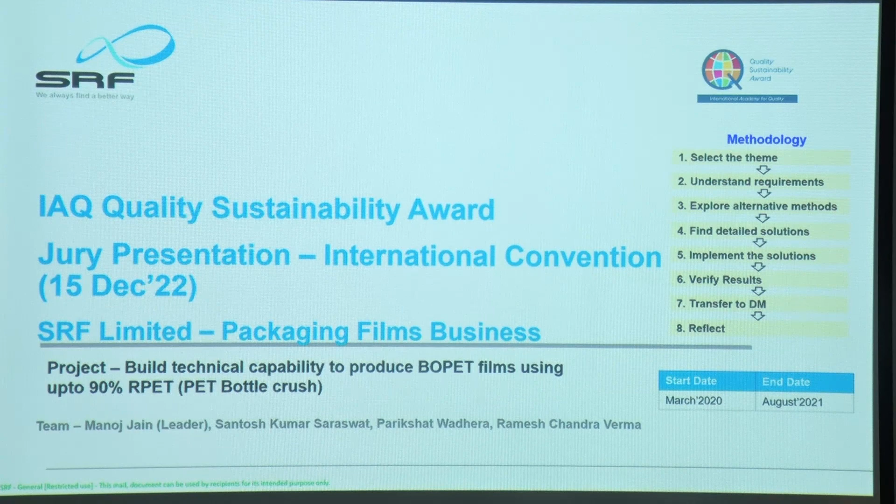So to solve this problem, we are using SRF's 8-step proactive problem solving methodology. My name is Manoj Jain and I am the project lead for this particular project.

So where is this need coming from? This need is coming from the fact that SRF had taken an aspiration 2030 to be more socially and environmentally responsible. There were various global industry forums having focus on reduction of virgin plastics, and there were various FMCGs and brand owners looking for sustainable value chain partners, which led us to take this policy goal in FY21 about accelerating sustainability initiatives, under which 4 different themes were identified. While there were other teams working on means like single family structures, product portfolio shifting from packaging to industrial, we thought of taking 3R as a challenge, under which we took the theme of building technical capability to be able to use 90% of PCR PET.

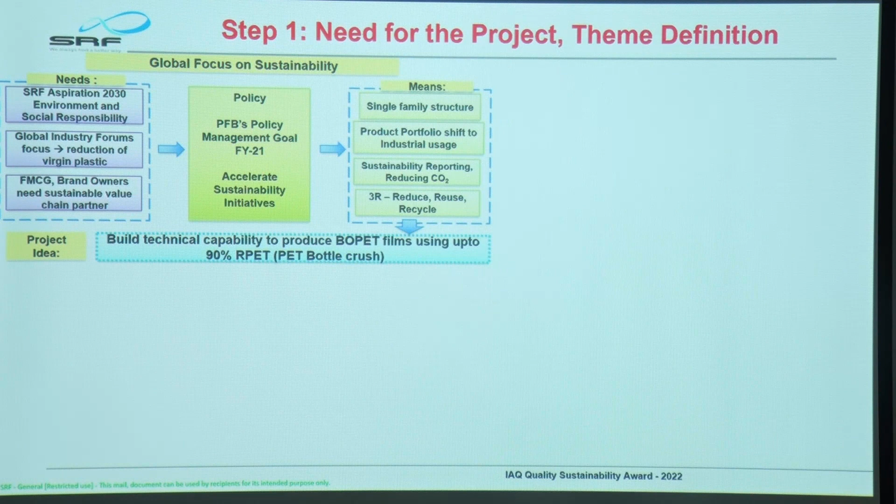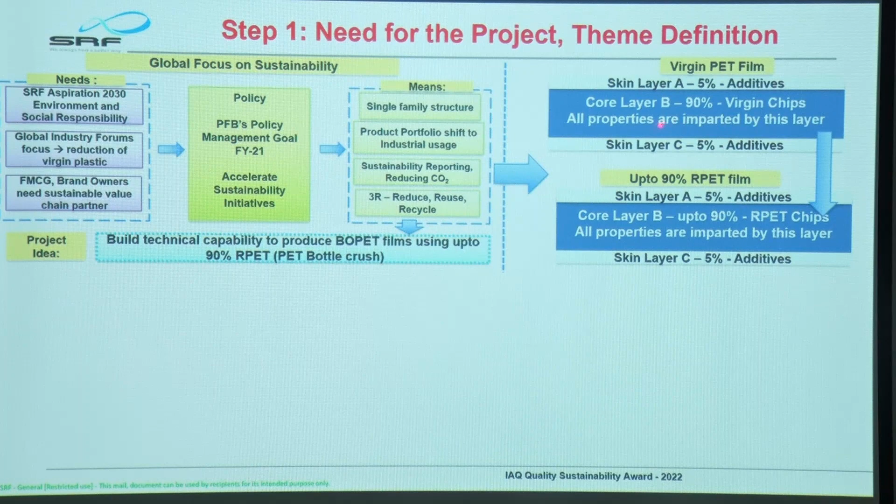So if you look at the structure of the film, it is a 3-layer structure where 5% on both sides is the skin layer with 5% additives, and 90% of the core layer, which is layer B, contains 90% virgin chips, and most of the properties in the film are imparted by this particular layer. And the goal is, how do we replace these virgin chips with PCR PET?

So if you see the flow chart of the process, virgin chips are coming from the resin plant. They are mixed with in-process recyclable waste, goes to the extruder. Then there's biaxial stretching in machine direction orientation and transverse direction orienter, and then finally a jumbo of 8.7 meters is produced, which is further slit into various widths as per customer requirement. So the goal is to replace virgin polymer with 90% PCR.

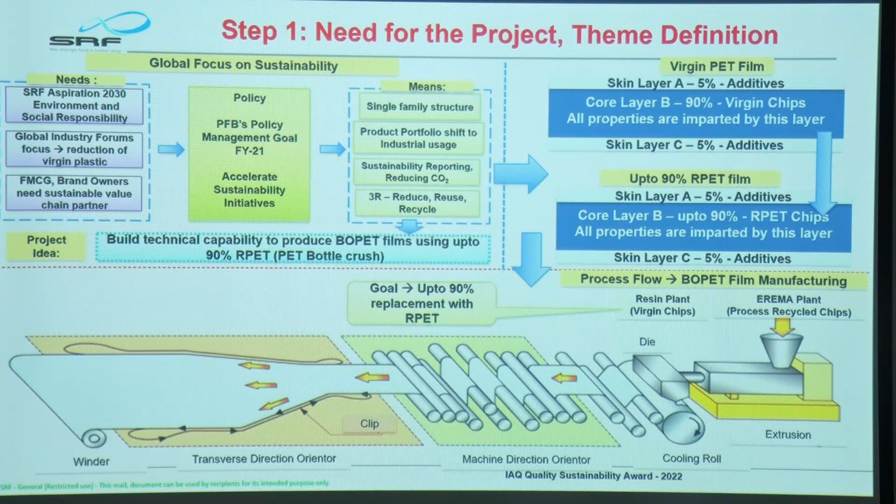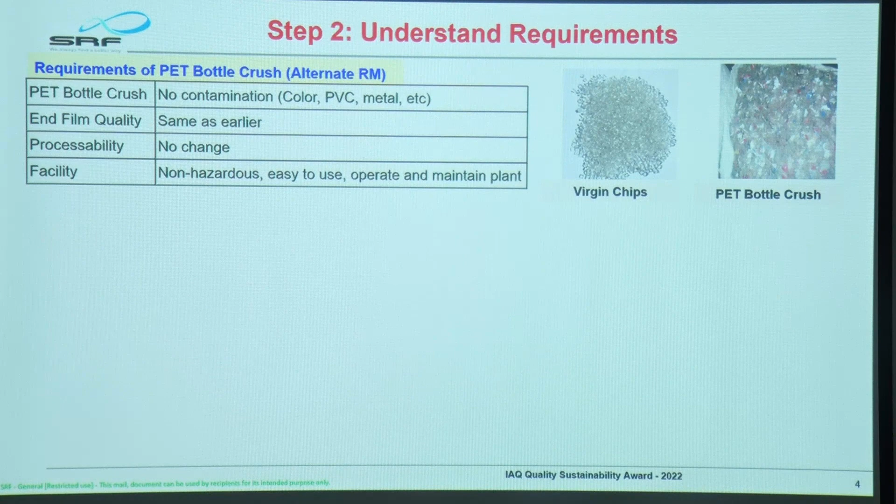So in terms of understanding the requirements, since we already have experience with virgin chips, we wanted PET bottle crush to be free from contamination, and for quality the target Q is absolutely same as that with the virgin chips. With respect to processability, we don't want any change to happen, and we want a safe, easy to use and operate and maintain the plant. That is the process that we require. So in terms of target Q, same as the virgin chips.

Target C, ultimately this has to be a commercially viable project, so that is our target C, that the cost of production should not be more than what it is today. And target D, since we are going to extrude it further, there cannot be any impact on the filter life, and we want to increase the number of customers with usage of our RPET films.

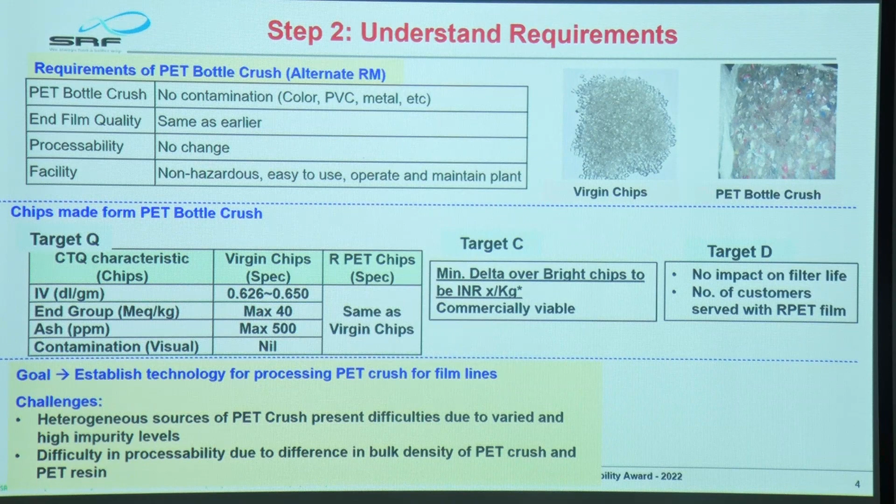So the challenge in front of us was, because this PET crush, as you can see in this picture, is very, very heterogeneous, especially the Indian PET crush, because of the consumer behavior in India. There's a lot of littering happening, and PET crush comes in very bad form. So it is washed and then comes to us, but still it contains a lot of contamination. So the processability, and of course this has different bulk density, very low bulk density with respect to the virgin polymer. So that again is a challenge to handle.

So with respect to the timelines, we thought that since it is an exploratory kind of project, this might take 18 months from project conceptualization to execution.

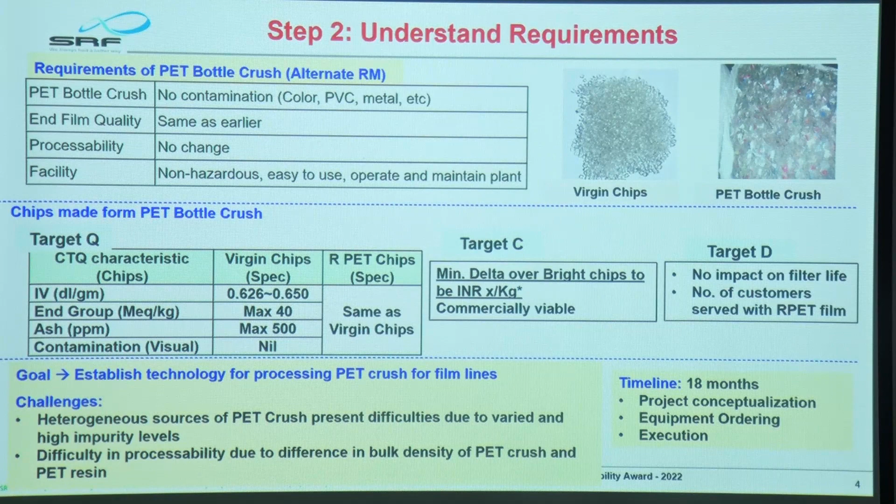So what we did, we explored various alternatives using PDPC. We thought of converting PET flakes into chips by using mechanical recycling. Since we already have an in-process recycler available with us, we went to the extent of 6.5 to 15% dosing in March 2020 and tried to produce film out of this. No issue was faced as far as dosage of up to 15% is concerned. So we increased the dosage to 30%. Then we started facing problems with respect to filter choking, color of the film, and low tensile strength. This made us think that this is not going to be possible with only mechanical recycling. So we have to look for other options.

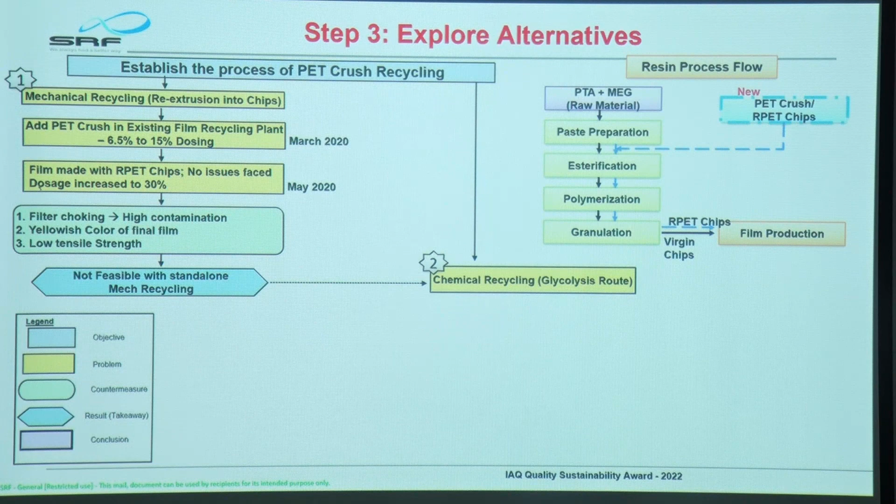So we thought of chemical recycling, that is the glycolysis route, as the other option. Before I take you to the chemical recycling, I want to inform you that we have a backwardly integrated resin plant where we use PTA and MEG as raw material, and we produce our own chips for film production.

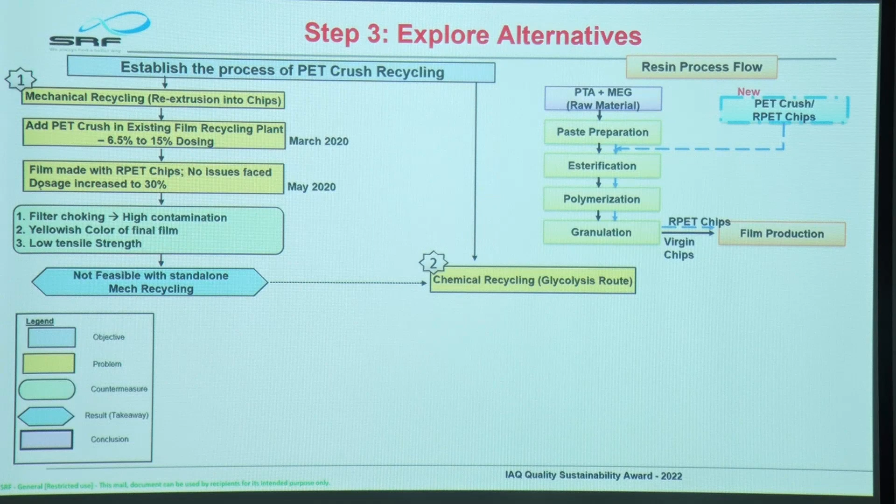So this PTA and MEG, we prepare paste and it goes into multiple reactions like esterification, polymerization, and finally chip cutting. With respect to chemical recycling, since we have a continuous polymerizer and a batch polymerizer, we thought of adding PET crush directly into the resin plant. But since it has low bulk density, there was black particle generation and very low filter life of the resin plant, so this idea was dropped.

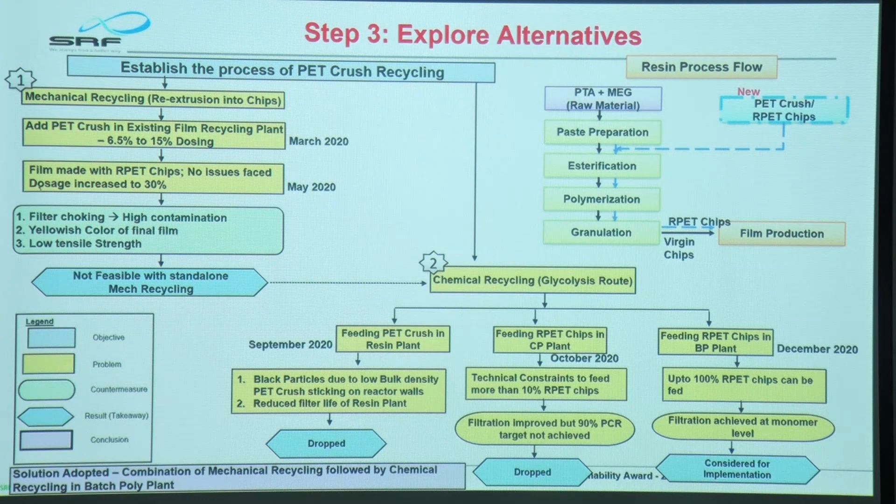Second idea was to feed mechanically recycled rPET chips in the CP plant, but there was a constraint with respect to capacity, so only 10% of rPET chips could be fed. Finally we thought that we will produce chips in the batch plant with 100% PCR PET made chips using mechanical recycling. That was the idea considered for taking forward, and this is the solution that was adopted.

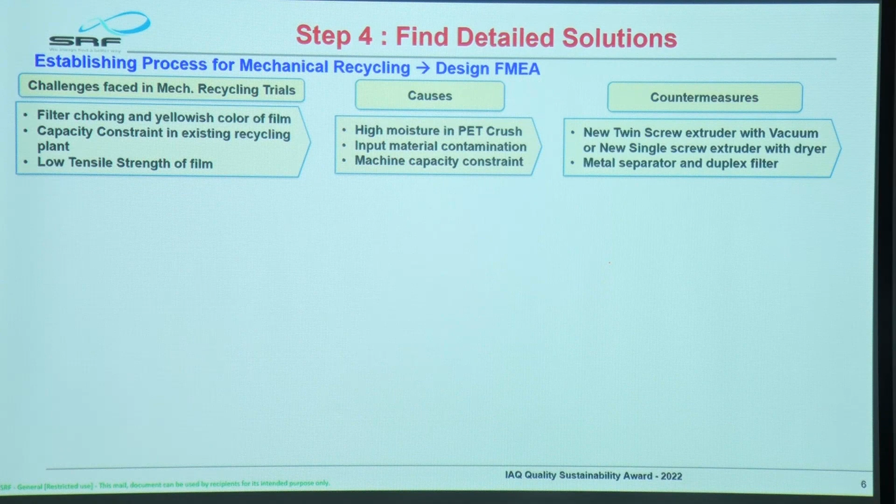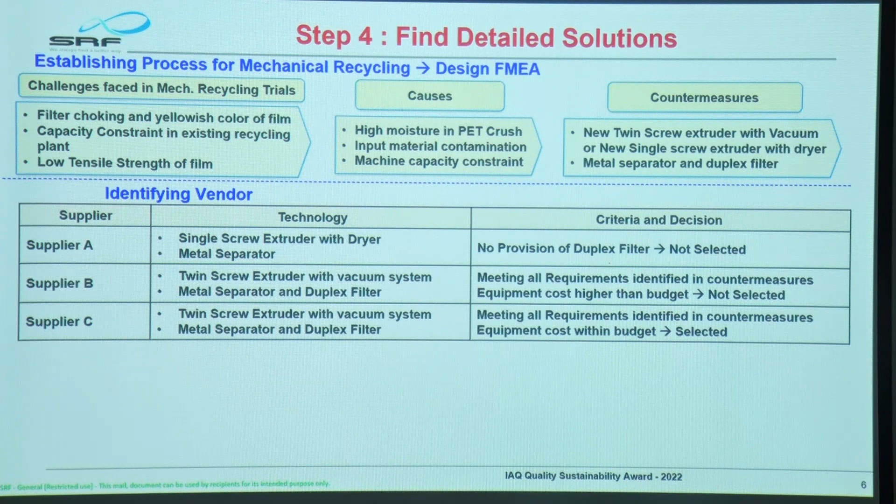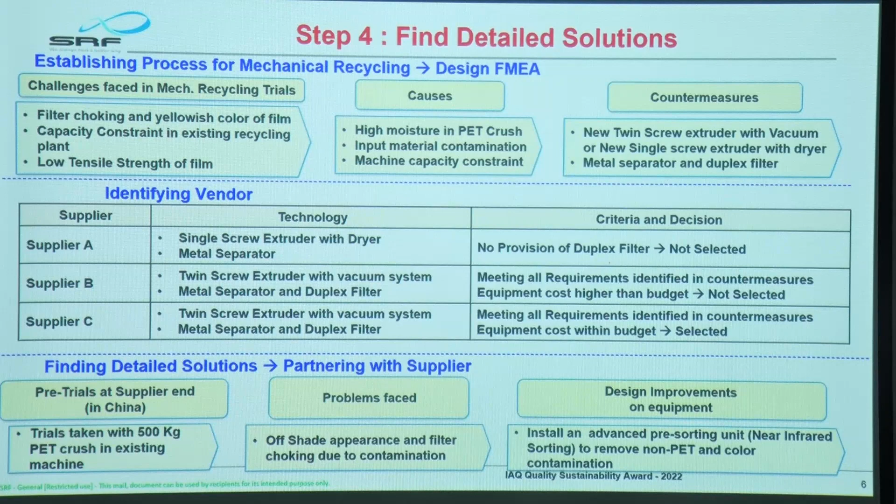By virtue of our selection criteria, we selected one of the vendors out of three to carry out this project. When the machine was ready, we ordered PET crush from China and took a trial with 500 kg of PET crush. We faced the problem of off-shade appearance and filter choking there as well, and had to install a pre-sorting unit and NIR sorting to remove non-PET and color contamination.

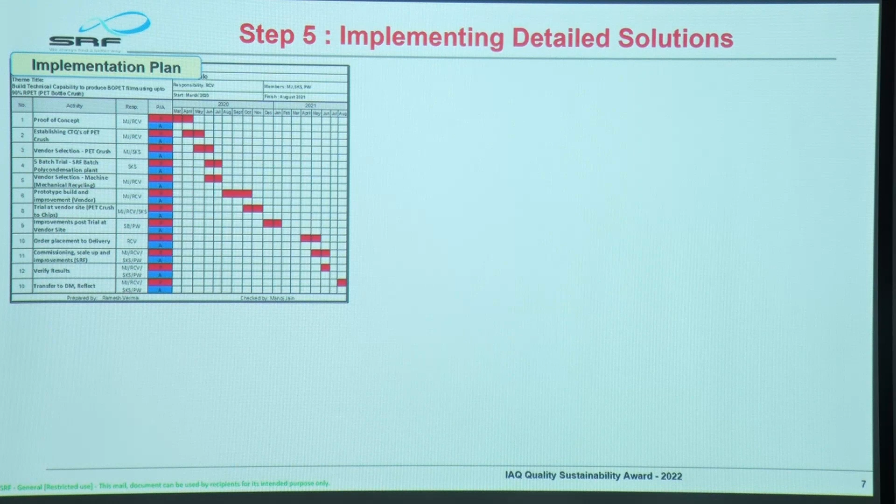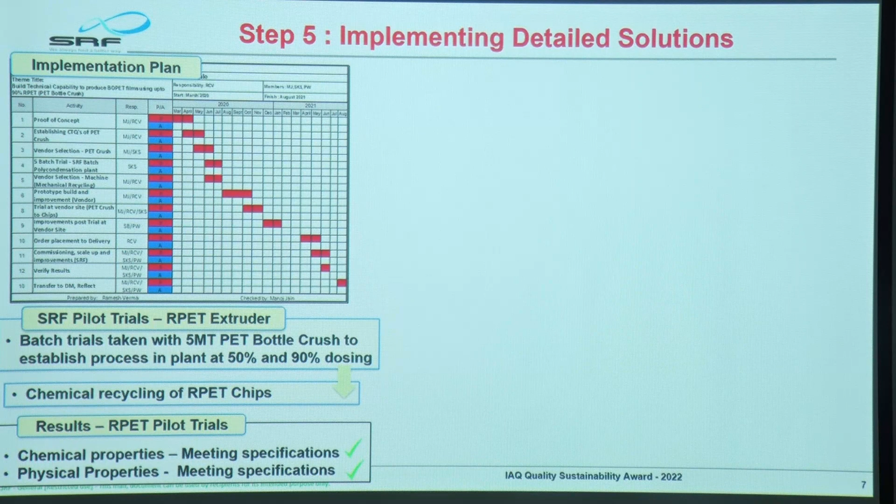So finally we ordered a sorter and color contamination sorter as well, and this project was implemented. A trial with 5 metric tons of PET bottle crush was taken at the batch plant with 50% and 90% dosing, and then subsequently chemical recycling was carried out, and a film trial was taken. Chemical and physical properties were meeting the expectations.

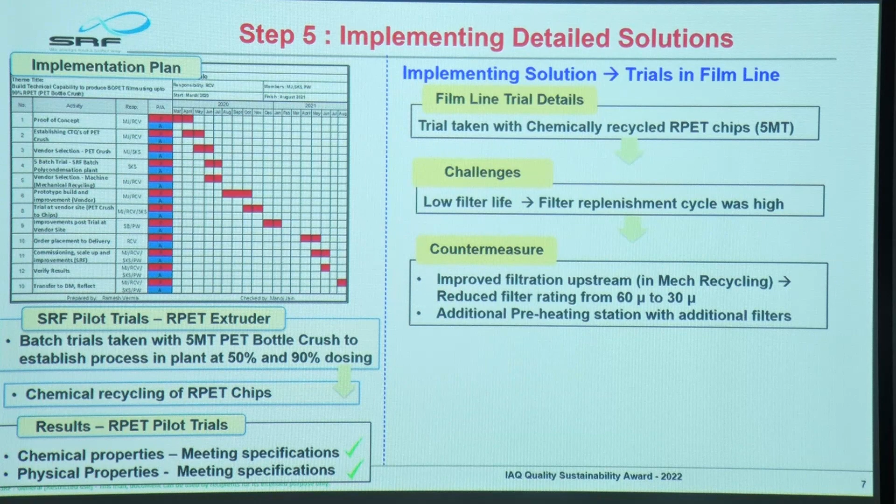In the film line, we faced a challenge of low filter life, so we had to carry out further modifications in the upstream process, changing the filter rating from 60 micron to 30 micron and providing an additional preheating station to be able to replenish the filters.

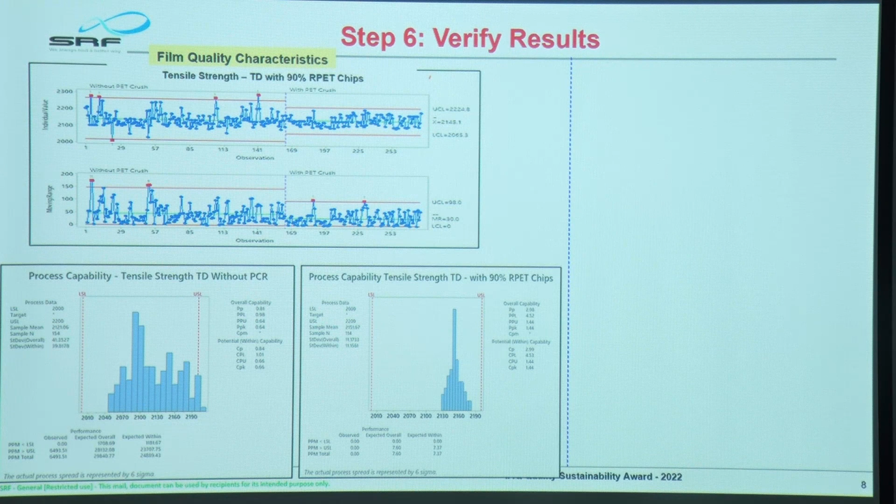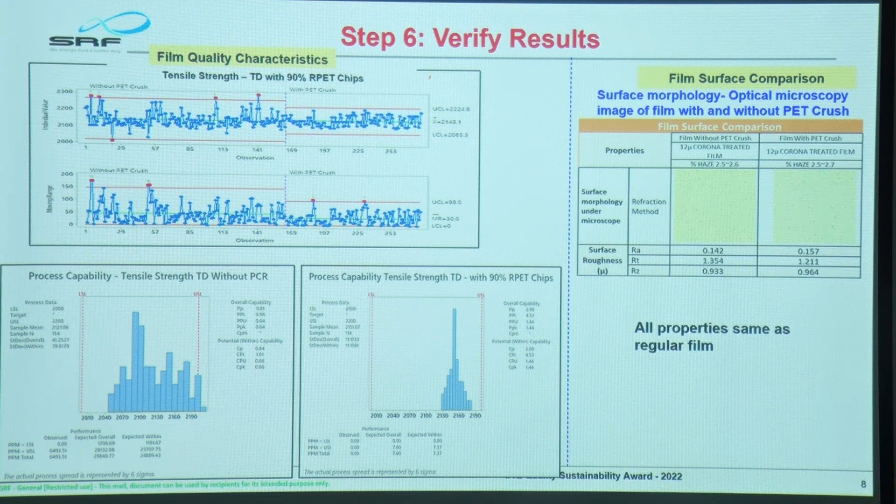With respect to properties verification, the tensile strength is well within specs, both without PCR and with PCR. The process capability we achieved was 1.44. We also carried out a film surface comparison, which was found to be well within the limits. So all the properties are meeting the requirements.

Coming to verification of the larger goal, as you can see, we have improved the number of customers aggressively seeking rPET from us. And in routine operation, it requires only one person to run this plant.

The project cost was 38 million rupees, and although we envisaged that the cost cannot be more than the existing cost, we are happy to share that this project has actually given us an ROI of 57%. In addition, we are proud to say we have been able to save on the carbon footprint to the extent of 1,020 tons per annum only in this particular supply chain.

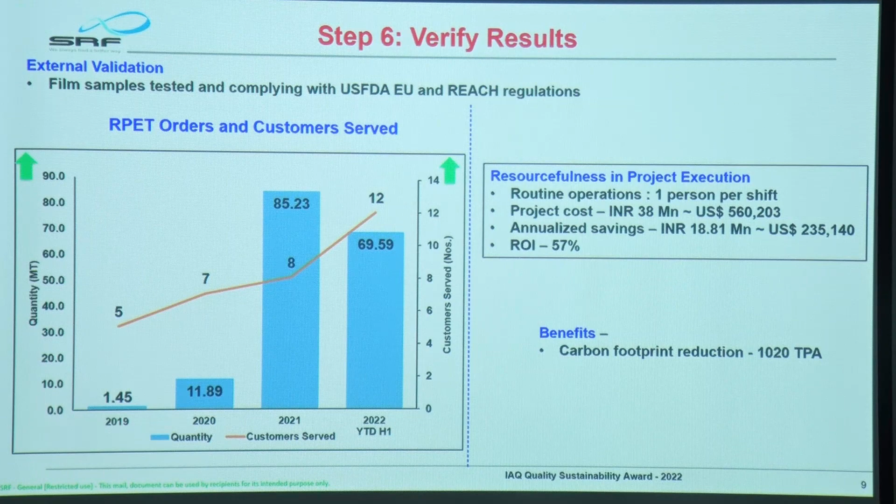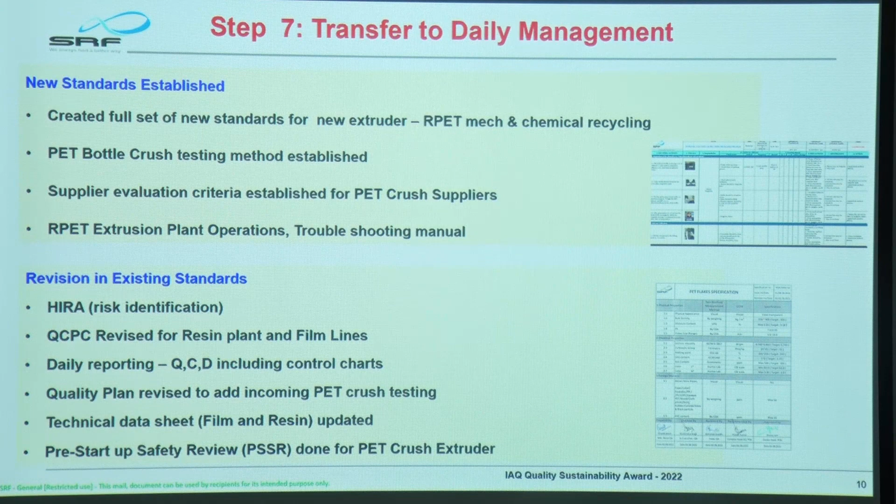For transfer to daily management, since this was a completely new project, it required establishment of new standards. We created all new standards for the new extruder, and PET bottle crush recycling testing methods were established. We also revised some existing standards with respect to QC/PCs, etc.

For deployability, since we have carried out this project in polyester, it can very well be adopted in polypropylene, and it can definitely be deployed in the B2B, bottle-to-bottle concept for PET crush back to bottle manufacturing. We are able to partner with suppliers—they learn from us, we learn from them—and it has been a breakthrough project which has strengthened our capability in our journey towards sustainability as a responsible manufacturer and helped the circular economy in a real way.

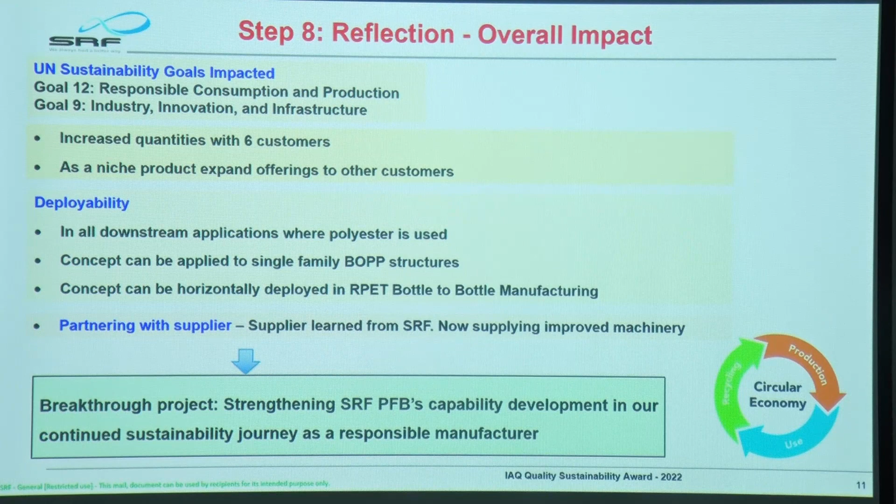So as our logo says, SRF, we always find a better way. We can proudly say that we have found a better way yet again. Thank you so much.